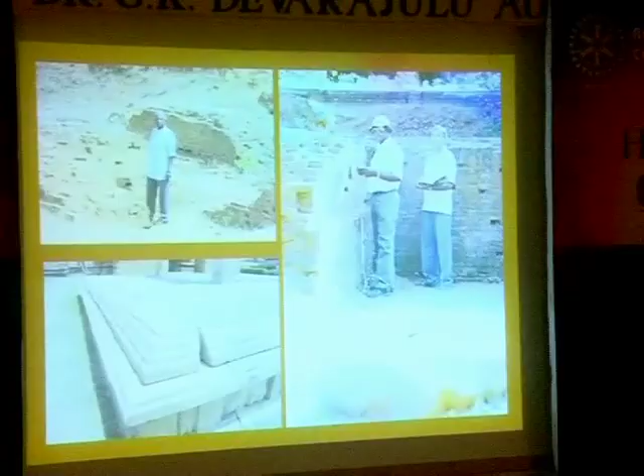We'll be seeing it. And the foundation underneath, on the left side, is made out of granite, no mortar in that. It's placed one over the other. So it's only an adukumanam, not kattumanam. They have not built it, they have placed it one over the other. To avoid lateral movement and lateral stresses, they have created a ball and cup arrangement. The one at the top will have a projection and the bottom will have a trough, a cup-like arrangement. And it was followed everywhere. In some places they've used even lead to keep the column.

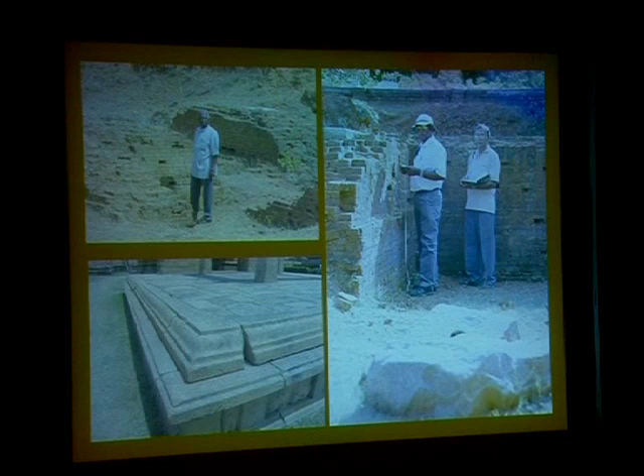See, these are the brickwork taken from Gangaikonda Cholapuram. The mortar is only mud. This is a mud mortar done with a fermented mortar. As per Tirupani Malai, and I got it from Dr. Kudavayil Balasubramanian, nellikai, that is your amla, and then black gram, kadukkai, nutmeg, then thanikai. All these things are made into powder, allowed to soak for some time, and then added to the lime mortar. So to ferment, that was the combination they had used.

And here they've used not lime, only mud, and the whole palace building was resting on this foundation, mind you. The foundation width was about 4.5 feet. After the offset of about 7 inches, it was 4 feet 1 inch. And it comes up to the plinth level. Above the plinth, they had used bed blocks to make the pillars stand. That's the simple principle.

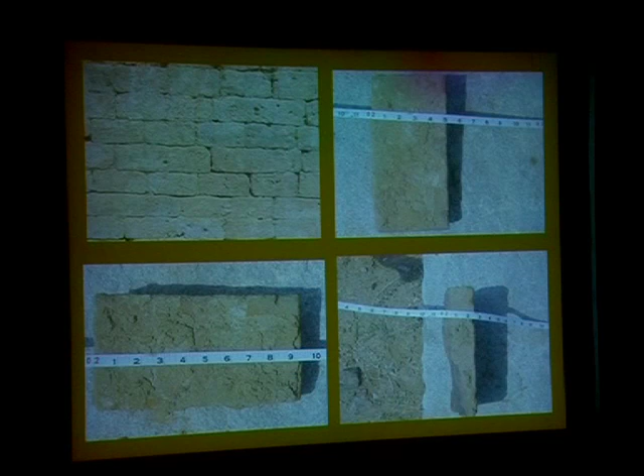See, coming back to the great Chola edifice. The foundation, what we had, is assumed, but we have seen it in Darasuram, which had long granite slabs, length of about 12 feet, thickness about 1.5 feet, width approximately 1 foot 9 inches or 2 feet. That has been arranged in one direction in the first layer.

The second one is in a perpendicular direction. Again, the third layer is the same direction as the first, odd numbers or even numbers. You can take it that way. That is the foundation technique they adopted. This is nothing but what we call a raft in this period.

The raft foundation is for the whole building. They excavate and create an RCC bed. On that RCC bed, they make the walls and other things, so that in any differential settlement, the whole building, the foundation, will adjust. A similar type of foundation they have used. And mind you, they have chosen a place where there was a limestone deposit. And it actually gave them the freedom of taking so much load on that.

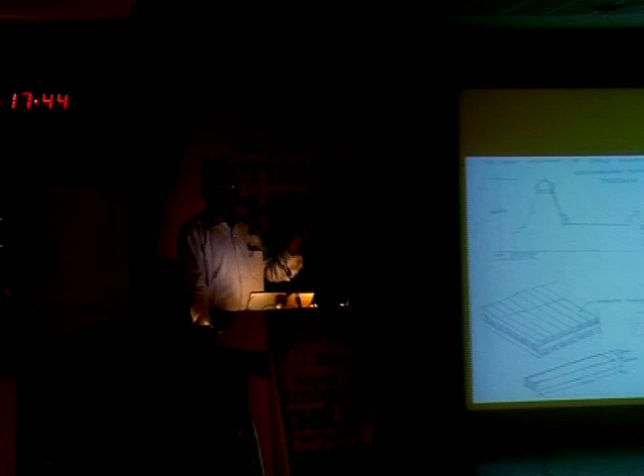This is an engineering marvel, and a spiritual glory, an architectural one, whatever you call it, it's totally different. In any aspect you analyze, this is number one. And in engineering terminology it is a compression member. When do we use steel? Only when the member is a tension member. Concrete cannot take tension, so we introduce steel, a foreign body, inside concrete.

At that time there was no steel, no concrete, no cement. Lime was there. They used only lime and converted the whole thing into a compression member. That's why the temple is hollow inside up to the top. A simple example is a coconut shell. Put two coconut shells inverted; a person of 75 or 80 kilos can stand on them. How is it possible? Because the load is transferred along the slopes of the shell to the ground.

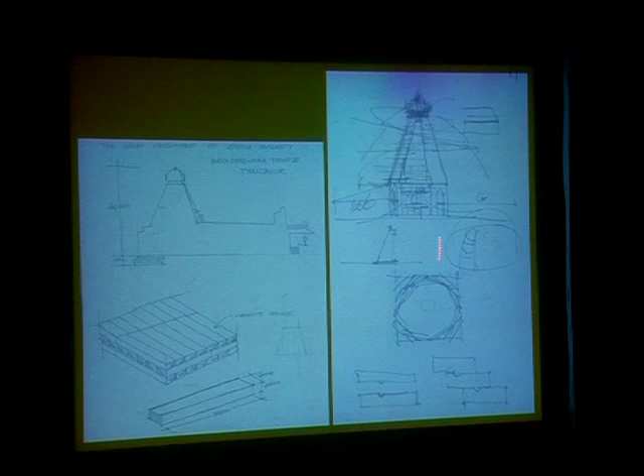That same technique he has adopted. The total load comes down, and that load is distributed between these two walls. I'll come to this technique later. The square is made into an octagon, 16-sided and other polygons, and finally it ends up in a curve at the top. Very simple. He has used all simply supported members, no tension member. It went on reducing the diameter, and finally ended up like this.

And see the joints. The technique they used here is corbelling: projecting the material just outside. We call it a cantilever. Stones are continuously placed like that. There was no mortar in between. The whole thing is placed one over the other.

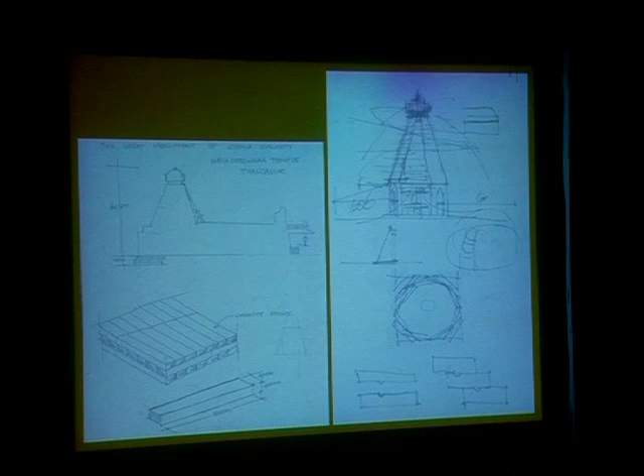Coming back to the foundation, I had mentioned the Big Temple; this is Darasuram. See this. Again, this proves there is no mortar joint. It is placed. See the joints. It is staggered. This is a whole single stone, which bends also. The placing of stones was so perfect, the engineering aspect. It is done so nicely.

And what my assumption is, they would not have done it with ready-made, modular standards. They would have brought a stone, and after seeing the size of that stone, they would have fixed it in that. Or they would have selected another stone to match this corner. Similarly, they would have brought the stone there, then after checking the size, they would have fixed it. But you cannot make a brick of standard sizes and place it. That is not possible. That is the only way they would have done it.

See here, see this size, no single stone is similar. No two stones are similar. So, naturally, they would have taken them at random. All must have had some standard length. If it is a little bit smaller, 6 inches smaller or 5 inches smaller or 5 inches bigger, they would have adjusted that according to the placement. So in the placement they have done it.

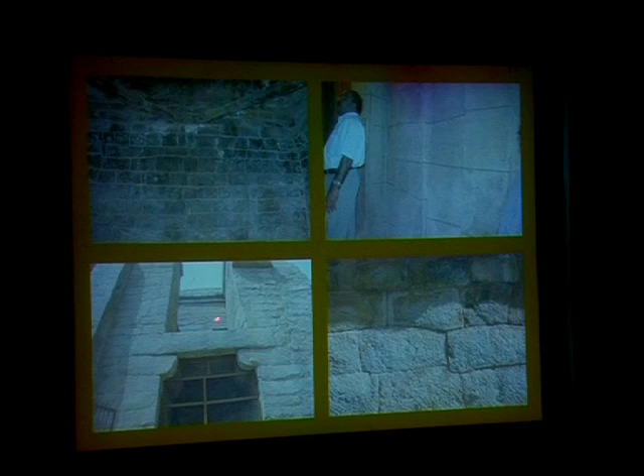See the walls, they have done it like this. Two sides dressed stones, and in between they have filled the wall gap with lime mortar. The strange thing I noticed in Gangaikonda Cholapuram is that the lime mortar contains a lot of coarse aggregates, small pieces of metal, which glitter. Lots of silica. When I removed it piece by piece, I could see the glittering effect. I'm actually going to take that to the Taramani Institute and check what material they had used.

And see this wall, you can clearly see. On either side it's very clean, and in between there's a filling. And see the bonding here. It's not in one line. The joint is here, this joint is at the top. So, they need not be at the same level, but at the same time it should have better binding.

That's how they have done it. See, this is a bed block for the next building where they can put a beam over that. This is an extension; probably this was done by archaeology later. They had used this for some other thing.

So see this wall. See this shape. This is narrow here, this is wider, and here this is broader, this is narrow. This itself retains against the lateral movement. Even if there is a mild tremor, this will retain it. This will take care of these things.

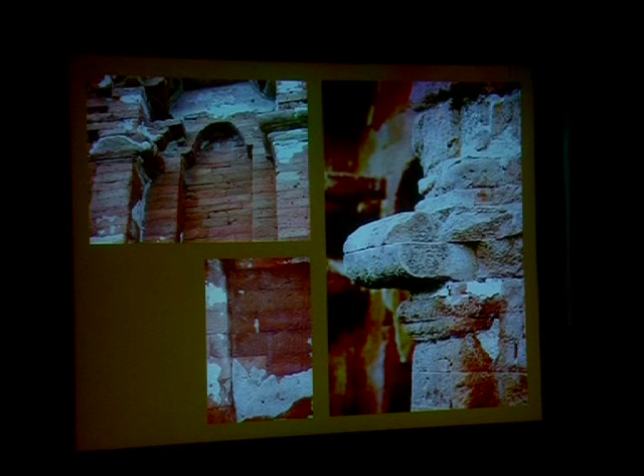And again, when there were no steel beams available, the gaps were filled by corbelling. They gradually project this, bring it to the top and close it, and then over that they use it. The same technique has been adopted in all the Chola structures, in the Brihadeeswara temple also, between two walls. And above the sanctum sanctorum, the Gopuram, they've done it like this, the Vimanam or Gopuram, whatever you call it.

In some, we could see timber also, well-seasoned timber. And in one of the constructions in Papanasam, Tirupalaturai, we have noticed they have wound the wood with coconut fiber rope with a lime mortar over it. They have just wound it over that and placed it on the wall.

And this is the corbelling, a beautiful example of corbelling. This is a stone corbelling. This is again stone corbelling. This is a brick. See this, how it goes, how the space gets reduced.

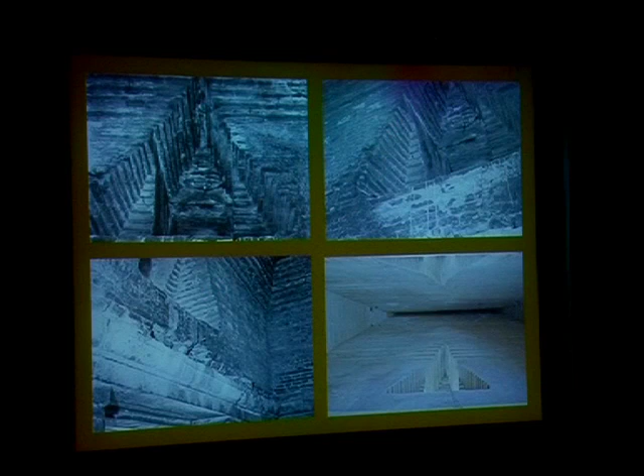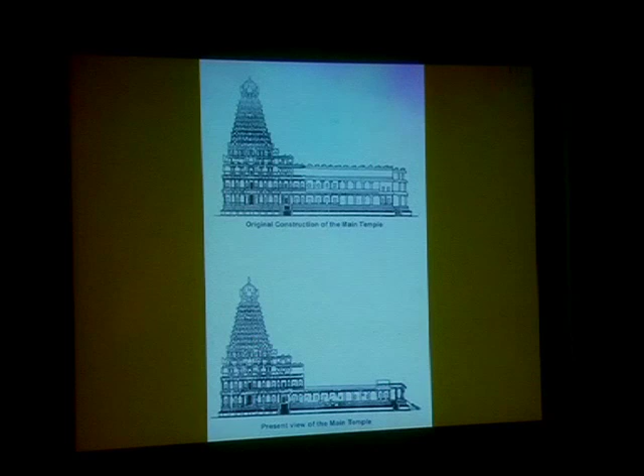And now coming back, this is a theory, I think, well explained by Dr. Kudavayil Balasubramanian. Our temple originally was like this. What you see is only this. Because of the invasion, they have demolished these two tiers. And what we see is only this as a complete one. This is drawn to scale. It is like this, and that should have been over this. Three tiers must have been there, but we have only one tier now.

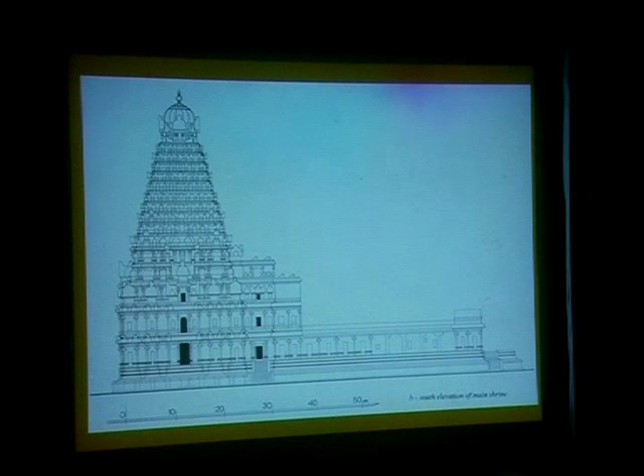And this is a cross section of that. All these things are done by French architects, French people. We have not done anything. The French government gave the scholarship, and they spent the money to document our temple. That's a paradox.

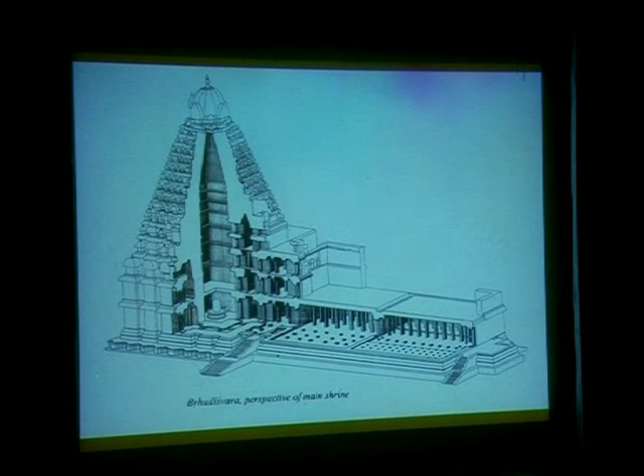And another, this goes up again. This takes the whole structure load. This is the wall. That is transmitted through two walls, concentric squares. The load is distributed. Again, this is a hollow structure. You could see this.

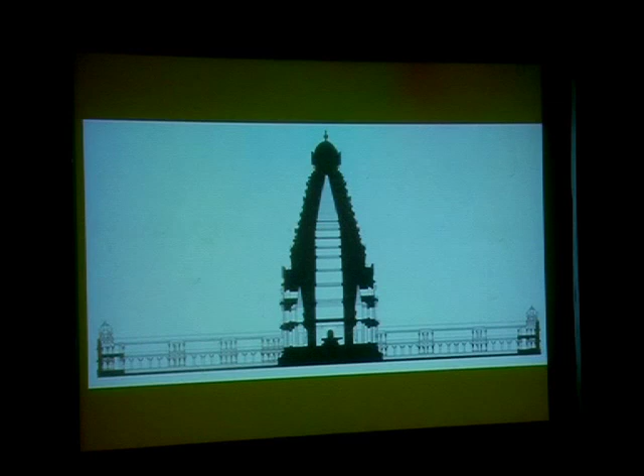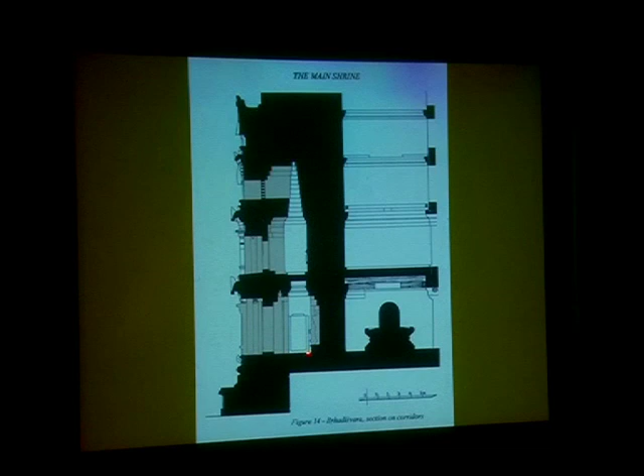Again, same thing. The inner is 11, outer is 13. In between is 6. See, the stone you have seen.

And another one, a vault in Tiruvadaimarudur. Somebody was asking whether it belongs to the Mughal tradition or something. But this is nearly 850 or 900 years old. See the vault here, a brick vault. It is wider at the base, and at the top it is narrow.

It is done totally with bricks. It is exposed, still existing without any damage. Excellent. There is no water leakage, nothing. It's done with lime mortar. This is a beautiful thing. The same similar technique we have been trying, and we have been doing it in some of the renovation works.

How we do it, just see. This is a flat arch, we call it. In some of the Maratha buildings we have this type of flat arches. Some of the roofs have this type of flat roofs with bricks placed like this. And there are segmental arches, very shallow arches. There are a lot of shallow arches in domes, in roofs.

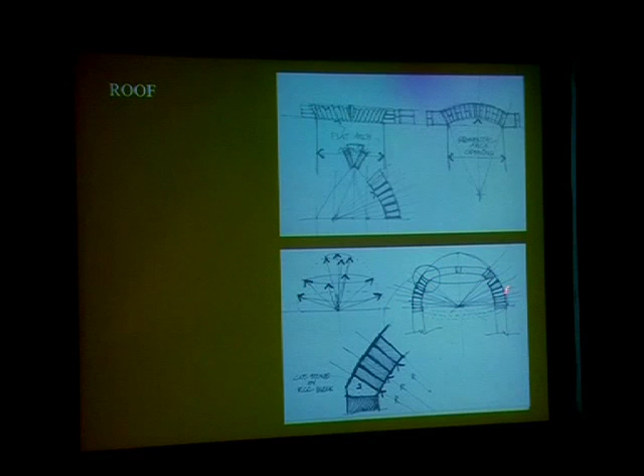And this is a circular dome. In the circular dome, a radius is maintained. When you rotate it 360 degrees in half the sphere, you get this. How we do it, you'll see. There's also another detailing, the two-point vault. The Tiruvadaimarudur vault is something like this.

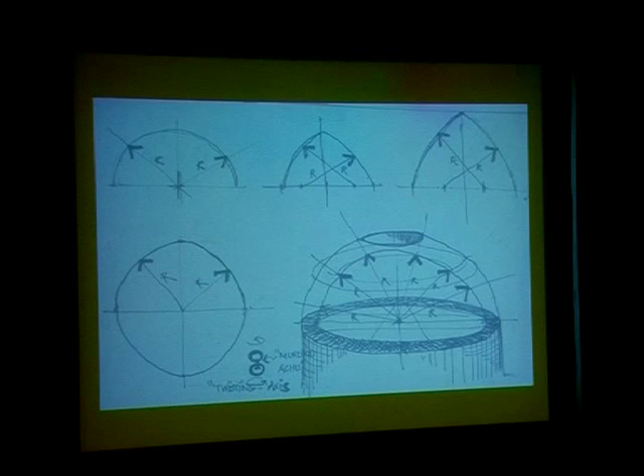And how a dome is done. This is an 18 feet dia dome. I have done up to 48 feet dia domes without reinforcement. So this is done like this. The bricks are placed parallel to this line. That's all. You can go on doing it. This will converge at a point.

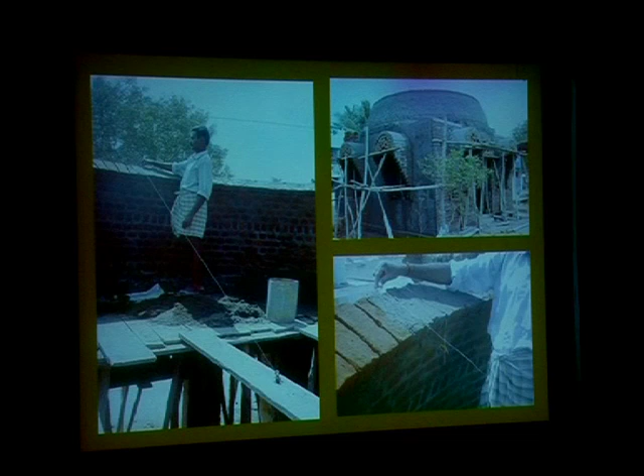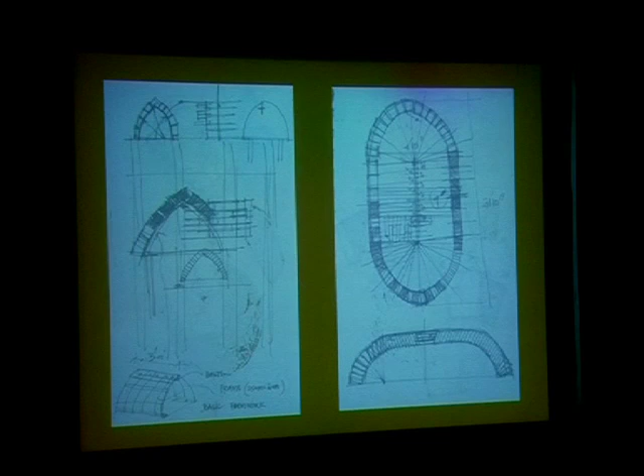This is for Ramalingadigal's Madam, Menyana Sabai, a meditating hall. We have done that. And in one of the temples we did this vault repair. That was mainly given to Mr. Umabadi and Mr. Vellinathan Acharya. They were doing the work and I was helping them in solving this vault problem.

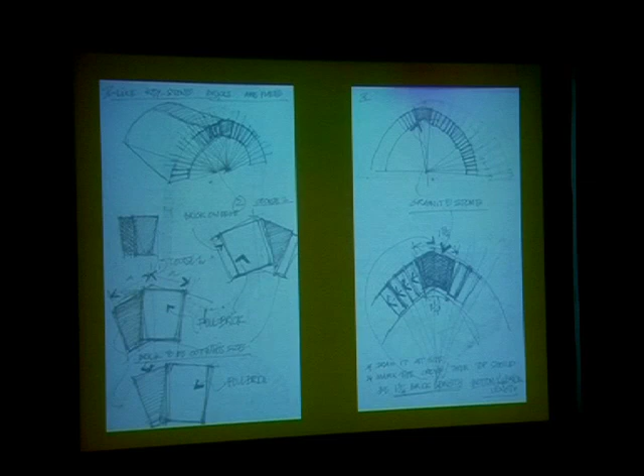See how the vault junctions have been done with brick. All these things are done with lime mortar. I had even suggested granite; you have to make a stone like this and place it over that. Once you place this, it becomes a compression member. Nothing can remove it. An elephant can walk on top. If you want to break it, you have to break it from the base.

The simple example is an egg shell. When the chick is inside and you want to break the egg vertically, holding it like this, you cannot do it. The same egg, the chick inside with a soft beak breaks it from inside. So arches and vaults are weaker from inside. When you apply pressure here, this fails. When you apply any amount of pressure at the top, nothing will happen. Very simple. Shell technology is only that.

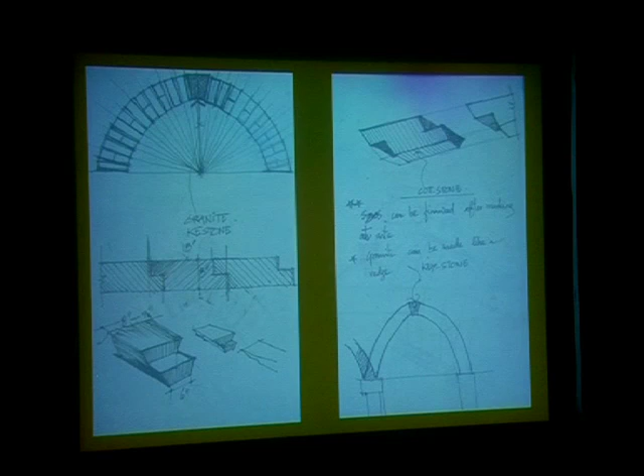And in that technology, we were very good. We were doing so much work. I don't know from where they got it. Simply we can say it is native wisdom, but that wisdom must have started from somebody, somewhere. We are searching for the point where it started. See, this is another; the temple had 3 walls.

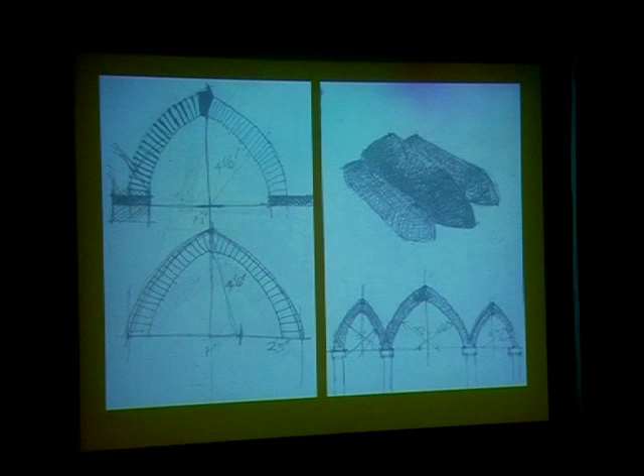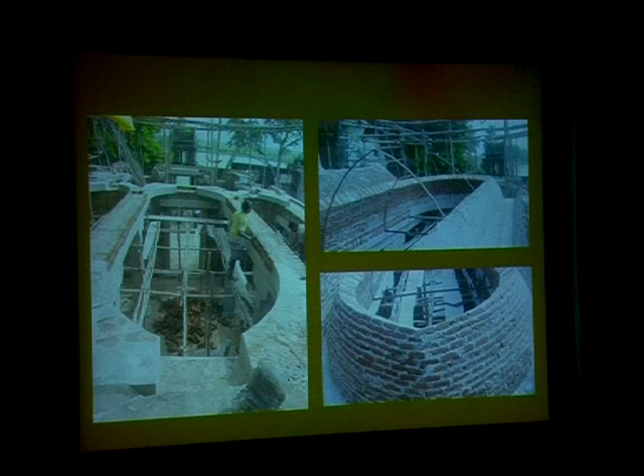See, we have done that. One is over, another 2 nearing completion. The inspiration is only from this. We got it from Thiruvidaimarudur.

All these pillars are done like that. The only difference is, in pillars, they do the carving, they do the sculpture work, then they place it. Not like others, not like a Brihadishwara temple. Here, they do the work and then place it vertically. But one thing, they must place it really vertical. Otherwise, that will fail. There will be eccentric loading. It won't be able to take it, it will fail. So I think the execution must have been very good.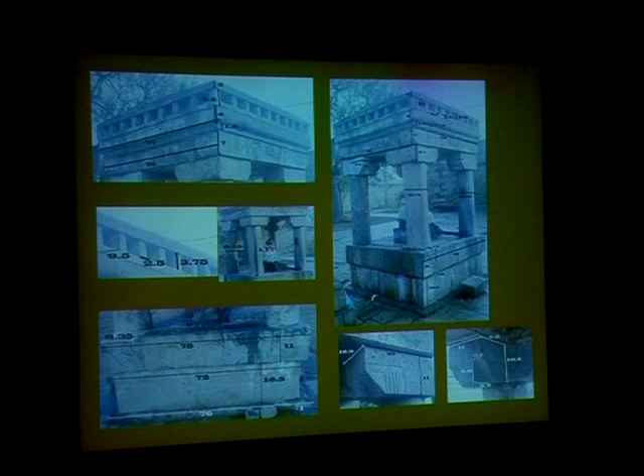Very simple. See, a top load, it is a separate beam-like thing at the top, and then it's again a beam with a slab, and it stands on a bed block, corner block, and then a round pillar, and then over a stone, again a stone. It is closely packed. We have done the work on this, and we have found out manually we are able to arrive that this is safe. A small example, we wanted to work on that.

And another amazing temple, which many are not allowed into, because the temple is always kept under lock and key. I don't know for what. This is maintained by the Archaeological Survey of India. It is near Kilapalur. This is called Rattai Koil. This is also about Rajarajan's period.

And see this, everything is done with stone. And then there is a Kalasam also with stone. And very beautiful, a lot of details in that. I took the photograph from outside the compound, from a long shot.

Now coming to jalis. You have seen how the walls are built, roofs are built, and now coming to the jalis. See what type of jali they had. In engineering or architectural terms, we call it jalis. See how they have done it. All these things are manually done. See the design, it has got a lot of intricate designs. It is placed in between, this is a window.

And the same thing, see here it is done by machine, water cutting. It's done at Madurai. They are actually among the biggest granite factories in the world; they come second in the world, next to Brazil. There they use water as a cutting tool. They cut it. This is only 12 mm thick. This is 18 mm. This is 20 mm.

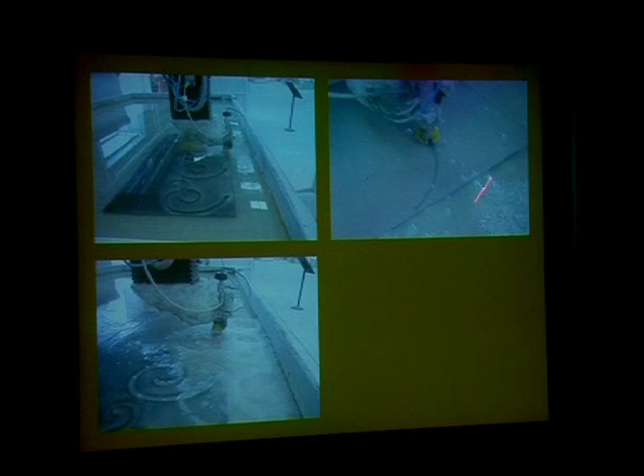The original concept is, throughout the 365 days, at noon, 12 o'clock, the shadow doesn't fall outside the base of the structure. That is the thing: Uchi Veyilil Nizhal Saya Gopuram. Because the base is wide, 100 feet by 100 feet square, and the top is 24 by 24 square.

During Uttarayanam and Dakshinayanam, you know the sun travels from one direction to another. 6 months it goes to the northern end, and the next 6 months it goes from north to south. So on those 365 days, at noon, the shadow doesn't fall outside.

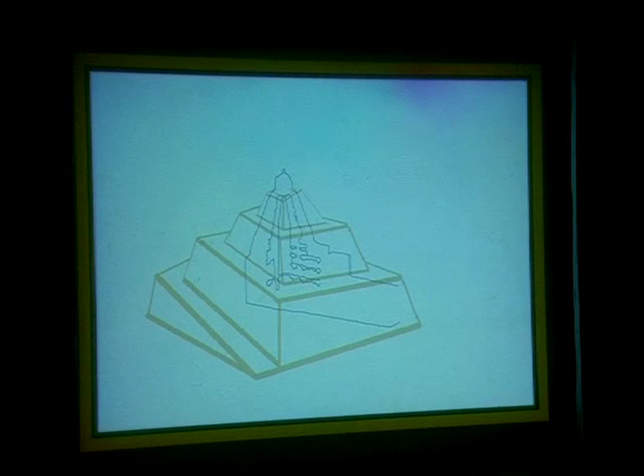And when we calculated the volume of earth which they would have used, that comes to the volume of Sevappanayakan Eri. We had done that also. We did a survey there, we calculated the depth, we calculated the volume of earth; it is the same. So maybe we are zeroing in on it. We'll see. It is for the researchers; you can work on it, think about it, and come out with a solution.

Now, before concluding, I would like to stress another thing, one important aspect I missed. In the big temple, when you enter, the first and foremost astonishing thing is the door jamb. We call it Nelappadi, which is about 40 feet in height and 4 by 4. The dressed stone is 4 by 4. They must have got at least 9 inches or 1 foot extra on either side. So 6 by 6 to a height of about 40 or 45 feet.

Where they would have got it from, how they would have got it, after bringing it how they would have dressed it, after dressing it how they would have kept it vertically. There was no hoist, no lifters, no cranes, nothing. They had done everything manually, and it is perfectly vertical. They have placed it vertically. The entrance, that is the amazing thing.

Like that you have a lot of things in it. Through every entrance you see the big temple, and when you go to that small shrine in front of the Amman Sannadhi, you see through that the whole temple. So everything is framed. It is a feast for photographers. You can take it anywhere; it is framed by a traditional building frame.